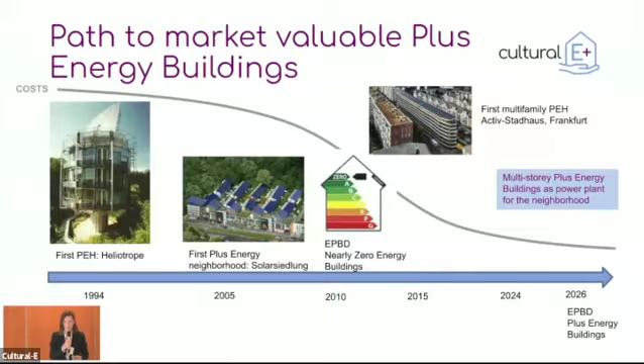What is a plus energy building for us? It is not only a building that produces more energy over a year than it consumes, but it is also able to have a dynamic match between load and generation to increase self-consumption and reduce energy grid congestion whenever needed, and it does that at the lowest greenhouse gas emissions possible.

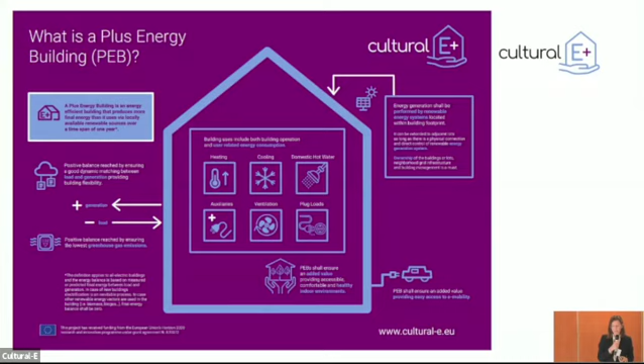It also has an added value for us in terms of health and well-being of occupants, providing a good indoor environment quality and a dynamic indoor environment quality. And it also provides easy access to e-mobility.

How can plus energy buildings become the new building standard? These are the pillars that we bet on at the beginning of the project: to put the user and household at the center, trying to understand their needs and guide them towards better energy practices; to define viable and interoperable technology concepts; to have an integrated climate and cultural approach - that's where the name of the project came from; and also to define business models that are attractive and that consider this added value of plus energy buildings.

Then we have 5 key technologies that we are further developing. The house management system, which is cloud-based, so we are storing and analyzing data on the cloud. It's also taking advantage of other buildings' information and comparing this with them.

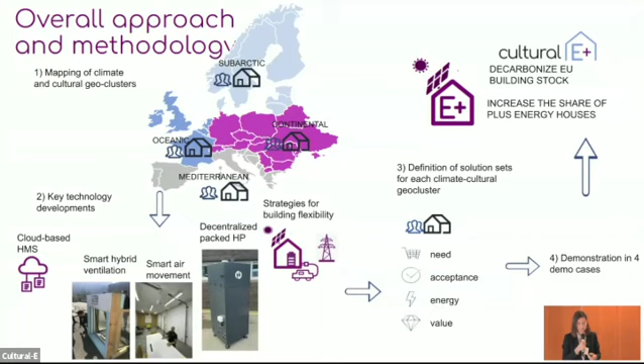All of these technologies are then combined in solution sets that are adapted and tailored to each climate and cultural geocluster. The aim is to demonstrate those in 4 buildings around Europe and to use them to promote and increase the share of plus energy buildings.

Here are the demo cases. We have different demo cases in the 4 geoclusters that we identified in Europe, and each of them has a different business model related to it, since we have a private social housing company, Vilogia. We have a public building for assisted living in Norway. We have a private real estate in Germany and a private cooperative in Italy.

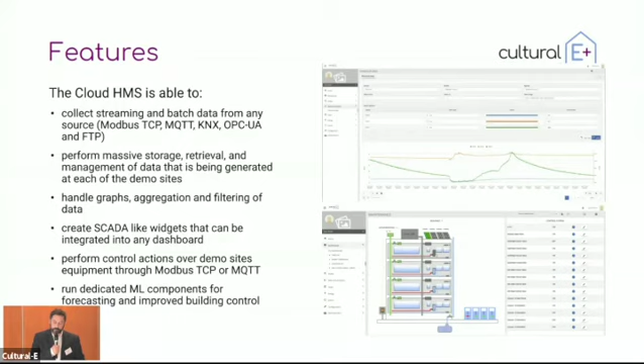So finally, to summarize, we are providing a cloud-based system compatible with all the different field solutions we are finding in the pilots, but also in the real world. We integrate user interfaces for different kinds of users, especially occupants, toward better practices, and also assist in the usage of technologies and control systems. Basically, it will act as a central brain for the control of indoor comfort and other kinds of control strategies.

Okay, it seems we have...

I have a question. Do you think our solution complies with data security and GDPR? As I explained, by design we conceived this HMS to be secure, because we understand that one of the main barriers to reach the residential buildings market with this cloud-based infrastructure are the data concerns, security concerns. And of course, as with any other cloud service, we must comply with GDPR, so it's ensured as well.

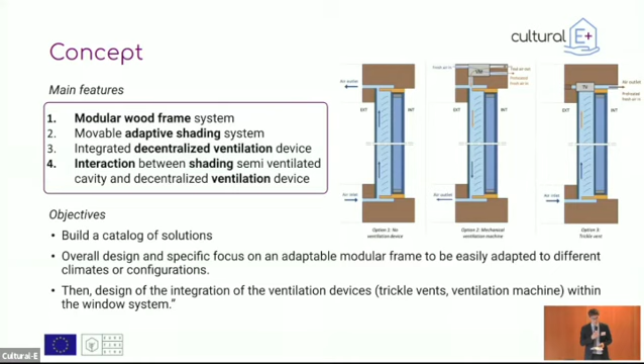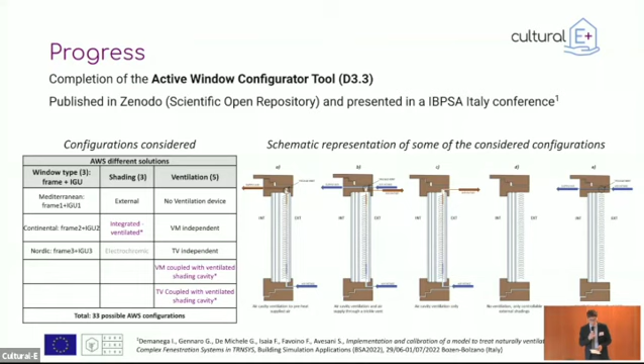Of course, we don't design one specific product, but combining all the possible solutions from different climates and the different possibilities of shading and ventilation, we set up a catalog of 33 different solutions, all based on the same principle and with the same goals. The whole catalog is published and you can take a look at it.

How to manage all this complexity? Because when we put different systems into one, we change what the window usually does—it's a passive element that manages light, thermal factors, sound insulation, air tightness, water tightness—and we add other stuff like shading and ventilation. We have tons of different parameters, and it's easy to get lost.

I think a big step we took in this project is to put together the specific parameters of a window, like U value, G value, and other parameters. There you see only the principal ones, along with parameters specific to the room and the comfort of the internal room.

Then we put together and find a way to combine everything, managing the normal parameters associated to a window, and also the parameters associated to internal comfort like indoor air quality, ventilation, daylighting, and thermal parameters, not just of the window but of the room.

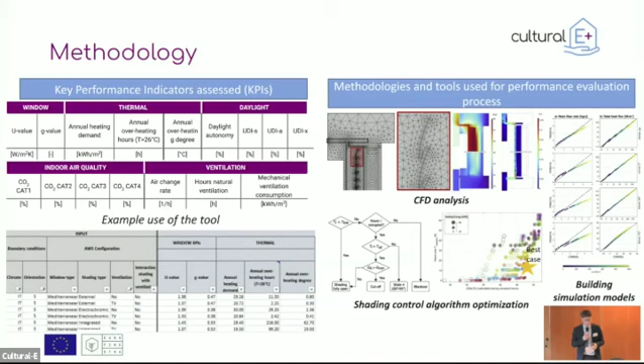We also worked on the shading control, giving an algorithm that can improve all the parameters we want.

At this point, we are basically ready to make the prototype, and we have defined which type of solution we would like to prototype. In the catalog you can find solutions from the easier to the complex. I think this is the main goal of the catalog: to give different solutions for different climates and different requirements. Not everybody needs the full system, but we give a good solution for each request.

About the demo cases, the 3 demo cases, we are finalizing the design and completing a CE marking for the easier version of the product. Basically it's a product made of this frame that is scalable and adaptable to different climates. Not only the frame but also the glass, though the glass is easier to manage.

We're defining the installation method in the demo building, and the system will be connected to the HMS.

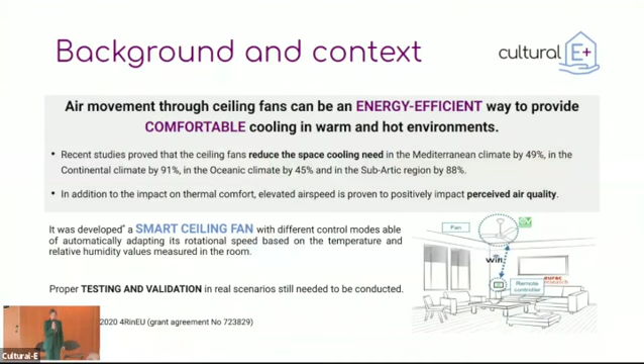In a warming climate, energy demand for cooling will increase a lot in the next years. So it's necessary to find efficient, passive, and low energy solutions. This presentation aims to show that air movement through ceiling fans can be an energy efficient way to provide comfortable cooling in warm and hot environments.

In particular, ceiling fans can also minimize the use of more energy intensive systems such as air conditioning. Recent studies proved that ceiling fans can reduce space cooling need in the Mediterranean climate by 49%, in the continental climate by 91%, in the oceanic climate by 45%, and in the subarctic region by 88%.

But that's not all. In addition, elevated airspeed is proven to also impact perceived air quality, so it can really be a good solution for indoor environmental quality and all its aspects.

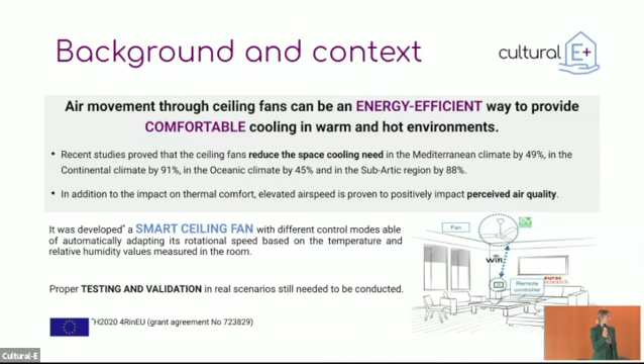As part of the Cultural-E project, EURAC Research with the University of Venice and Vortice performed an experimental campaign this summer. What did we ask ourselves?

First, does air movement improve thermal environment and indoor air quality acceptability in residential buildings? Then, does the automatic algorithm work in terms of resulting comfort? And is there any significant difference in people's answers between manual and automatic control?

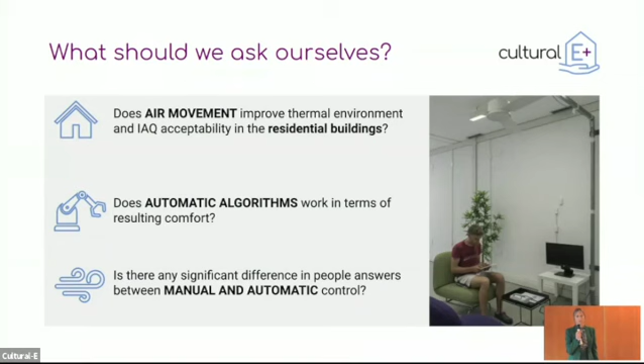In order to answer those questions, we performed a climatic chamber experimental study in our lab in Bolzano. We used two climatic chambers set up as residential environments, like living rooms.

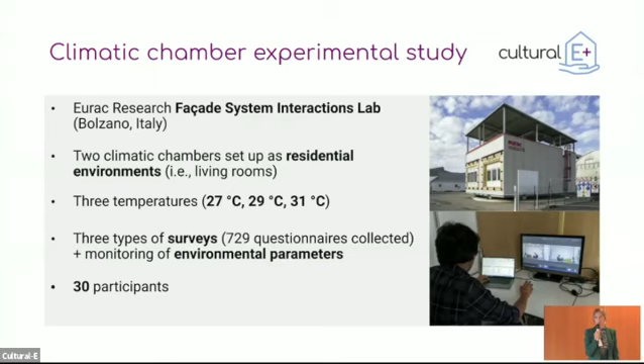Participants experienced 3 different temperatures: 27, 29, and 31 degrees. We asked them to fill out questionnaires while we monitored the environmental parameters. The sample was composed of 30 adult participants.

So we could answer that question, yes. Air movement really can improve the thermal environment in residential buildings. In particular, we could see real benefits until 31.5 degrees. After that, the air movement provided by a ceiling fan does not seem to be enough to guarantee thermal satisfaction. We could also calculate the temperature at which it's necessary to switch on a ceiling fan, and this temperature is 27.6 degrees.

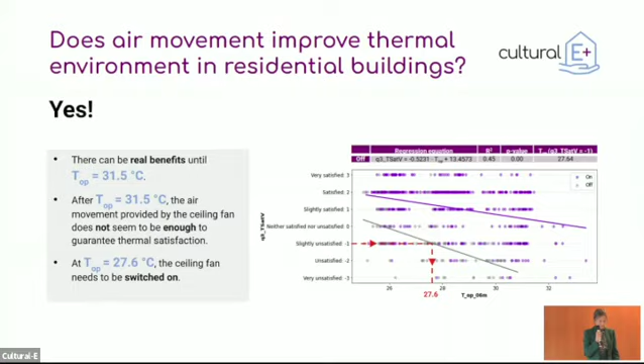The automatic algorithm seems to work really well in terms of resulting comfort. On a thermal comfort point of view, the percentage of satisfaction is higher than 85%. On perceived indoor air quality, higher than 82%. On perceived air movement, higher than 58%, and on perceived soundscape, higher than 77%.

Then we asked ourselves, is there any difference according to the ceiling fan mode? What are the different modes? Speaking about control, the modes are the automatic mode, so the algorithm mode, and the manual mode. Then there are two flow direction modes: direct mode and reverse mode. Direct mode means the air movement comes from the ceiling and goes to the floor, while reverse mode means the air movement goes from the floor to the ceiling.

We could see that the automatic mode differs very little from the manual mode in terms of resulting comfort. This means the automatic algorithm can predict really well what people want. We could also see that the direct flow mode works better than the reverse flow mode, and that the automatic algorithm is able to increase the neutral temperature in summer by 2.3 degrees.

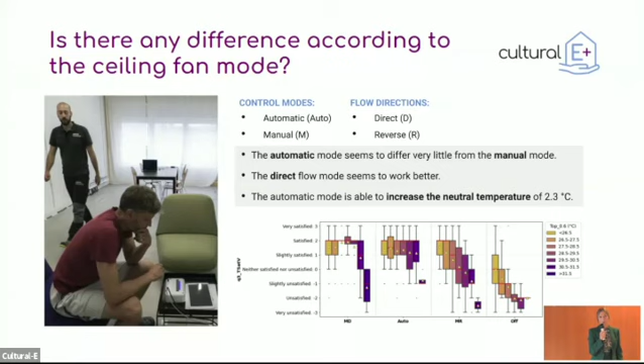And this is really important from an energy point of view. To conclude, we could see that ceiling fans are an effective way to provide both comfort and energy saving in warm and hot indoor environments, and that they can complement or replace the use of more energy intensive cooling systems such as air conditioning. We developed a comfort algorithm to automatically control the fan speed. The important part is that the comfort level achieved with automatic control is the same as what people experienced with manual control, but without requiring them to do any actions. So, thank you.

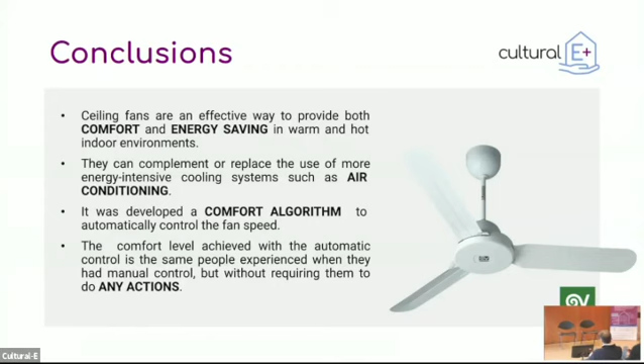So how will climate change affect the energy demand of households, in your opinion?

Or energy requirements for cooling systems, that's correct. That's what we aim for with smart air movement.

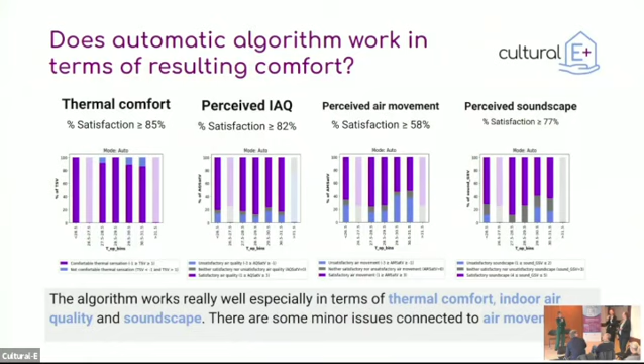Thank you. My question, I put it also in Slido. What was the height of the rooms where you were testing? Because here, if I imagine a fan, it will not be good for some person. It was 3 meters high. Yes, because in Italy, regulation for indoor rooms where you can live requires ceiling higher than 2.7 meters, so 3 meters.

Yeah, actually, to comment on that - yes, it depends on the area. To further comment on that, it is a limitation of the technology that we acknowledged since the beginning of the project, because it can be, and it proved to be, an alternative to cooling systems, and the highest potential is actually in the northern and continental climate, because it really can be an alternative to AC systems. But the issue is about the ceiling height, so energy efficiency regulation requires lower floor-to-ceiling height, and this is something we have to work on to re-engineer the product in order to fit into those heights.

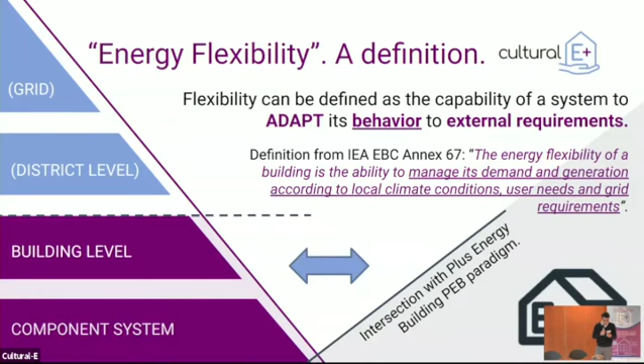On the left, you can see grid, district level, building level, and component system level. In the presentation I'm introducing now, we are seeing energy flexibility decline only to the building level and component system level. At this level, we are going to see if it's possible to change the consumption behavior and aim at reducing some kind of objective, always in the framework of PlusEnergyBuilding.

Therefore, we are driven by the same final objective: environmental and cost reduction. In this sense, it's possible to find a theoretical definition of the possible actions that may be put in place to practically actuate energy flexibility. On the bottom left, you can see consume less, therefore energy efficiency, and on-site renewable generation—the two components embedded in the building that enable local production and reduction of consumption during its operation.

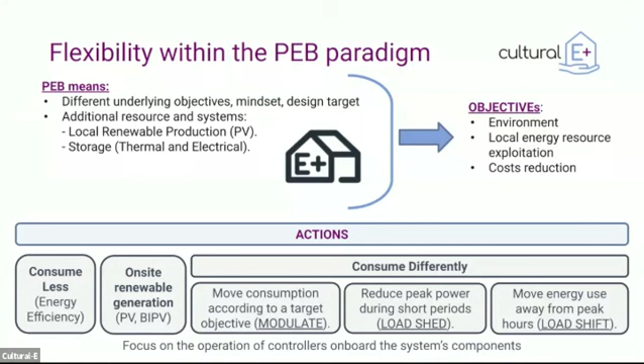Whereas on the right, we see consume differently. By consume differently, I mean the change in the way the user interacts with the building, or the building itself, therefore the devices present in the building may change their operation. Here the keywords are modulate, load shedding, load shifting. These are keywords very related to the electrical point of view, therefore to the load profile connected to the load consumption of the whole building, the devices, the appliances, and so on inside the building.

Here we can see two different contributions, which I already introduced. On the left, a positive contribution, therefore production from photovoltaics or building integrated photovoltaics. There is also production introduced by the energy storage system, which will shift the actual PV production in case the renewable energy does not match the actual consumption the building is experiencing in that moment.

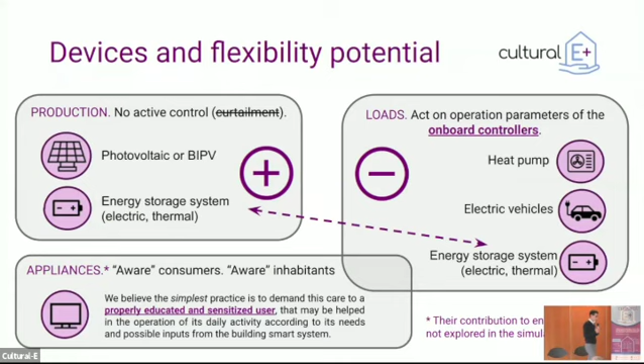On the right, we can see the loads. Here I present a reduced subset of loads: heat pump, electric vehicle, and again energy storage system, therefore static batteries. These are the most energy intensive loads. On the other side, they have on board a controller on which we can operate, on which we can act to induce the change in energy consumption that we saw in the previous slide.

As you can imagine, Annamaria already introduced that we are exploring the potential in different geoclusters. All the subset of devices you see in the previous slide have different potential within the four identified geoclusters. These potentials are identified both from state-of-the-art literature and from load profiles acquired from other simulations performed in other tasks of the project. The final key point is that we bring all the components present in the house, and so all the consumption patterns that compose the overall load profile of a house, to an electrical domain, therefore an electrical load profile.

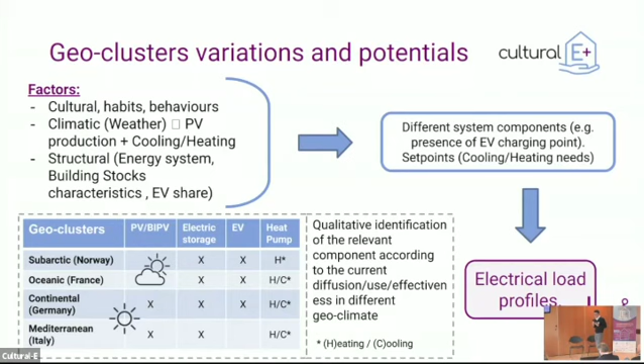This key point is very important. On the other side, we may imagine defining different objectives, for example cost reduction, and therefore we require a more sophisticated environment to produce predictions related to energy production, renewable energy production, energy consumption, and other factors that may impact the actual energy profile of the building. Here we call this advanced control logic, or model predictive control—you have to run the simulation, the virtual model of the building, and check if it's possible to maximize a given objective, for example cost reduction.

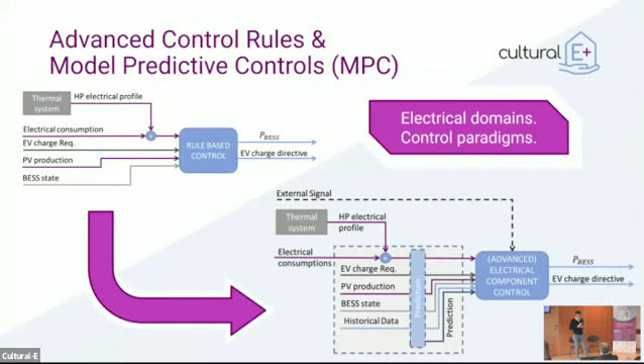Now our work is to perform simulation on that kind of scenario. Therefore, we set up a simplified model of the building and run a long-term simulation on the length of one year, and we check if it's possible to minimize some kind of objective.

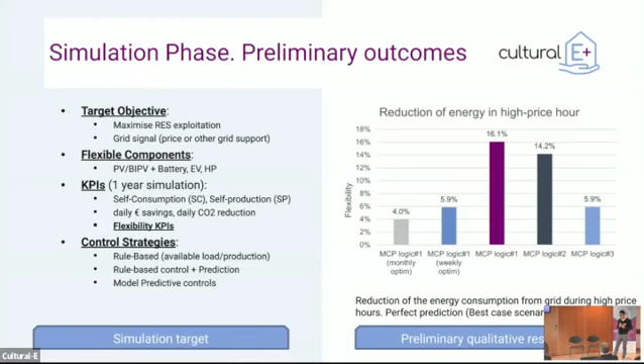For example, we can see some preliminary outcomes that show that with different kinds of model predictive control, we can achieve a reduction in the energy consumption from the grid during the so-called high price hours, which we define according to an external signal. The key point is that we have an external signal on which the objective function is based, and we try to minimize this cost function.

Finally, I spoke of simulation, but our final target is to bring some of the devices and technology that we see in the previous slide into our experimental facility at EURAC Research in Bolzano, Italy, and to try to match the following point, that is, somehow model validation, and check if it's possible also to port to existing devices some of the logic that we develop only in simulation. This is my last slide, so thank you for your attention.

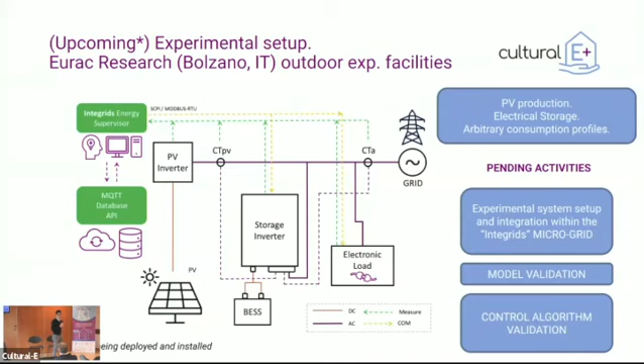I don't know if you have questions, because I have no slides after. So yeah, I see.

Thank you so much. I wondered, this is, my question is a little bit based on the experiences from practice in Denmark. So we're subarctic, little sun, very cold, and so on.

We find it really, really hard to do. I mean, it's okay to design energy neutral buildings in operation, but the problem is that when you factor in the embodied carbon in solar cells, in the building fabric, it doesn't look so good. Particularly for PVs, that if you look at market shares, are usually based on production by coal in China. And in our environment, these are never paid back environmentally. I think that they may be paid back, but it takes many, many more years than, for example, the service life.

Exactly, and this is the reason also why we are exploring all the devices and technologies in different geoclusters. Because, for example, in subarctic regions, the CO2 equivalent emission connected to production of energy is very, very low. So if you set up an objective function to minimize the CO2 emission, it's very, very difficult to do something with the devices, because it's already very low.

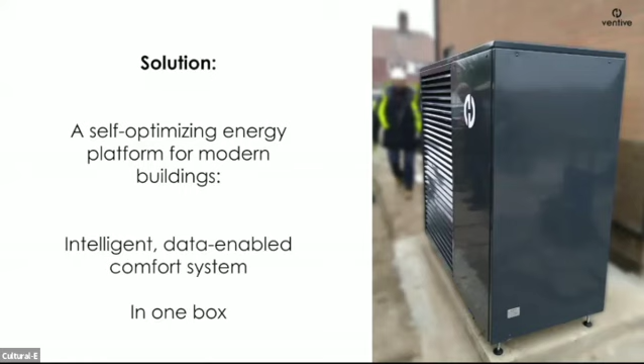So it has a full mechanical ventilation with heat recovery system in the B model. I can take you through the product. So we have three models. The exhaust air heat pump is built for certain markets that are looking to place heat pump technology into a new build,

and some retrofits that haven't quite managed to achieve a decent level of air tightness within the retrofit itself. It provides renewable heating. It uses a centralized exhaust ventilation system to extract air from the building to create a healthy environment indoors. Natural makeup air will replace the exhausting air and allow the building to stay healthy.

But obviously, normally with a centralized mechanical exhaust system, you would have a huge energy loss through convective heat loss. Now, we will pass the airflow through a heat pump and extract a large proportion of that heat that would normally be lost to outside. We will then put that heat into a phase change material block at the base of the unit, which will give us a significant amount of energy storage. And that will then be directed back into the property for space heating and hot water as well.

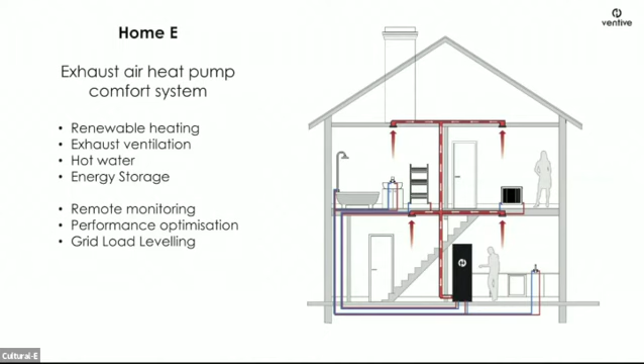The reason we've shown it to a communal area is because, again, it's subject to air tightness of the building. If you have not achieved significant air tightness, you would struggle to balance the airflow well through the building by supplying and extracting from each individual room. You're better off supplying to a centralized area and exhausting from each room. You would get some makeup air coming through from infiltration, but the risk to supplying to each room means you can end up pushing warm air out of the building through the cracks, etc.

So there's the initial difference. Now what the introduction of a supply air through the system and a balanced air handling system allows us to do is to give an element of cooling to the supply air based on creating hot water during the summer.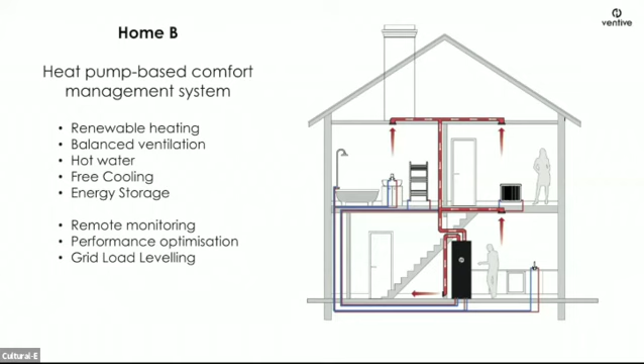Next step is to develop this into a full hybrid system, incorporating the ability to switch between an exhaust air handling system and an air sourced heat pump. This allows us to deal with larger loads, and again will increase efficiencies.

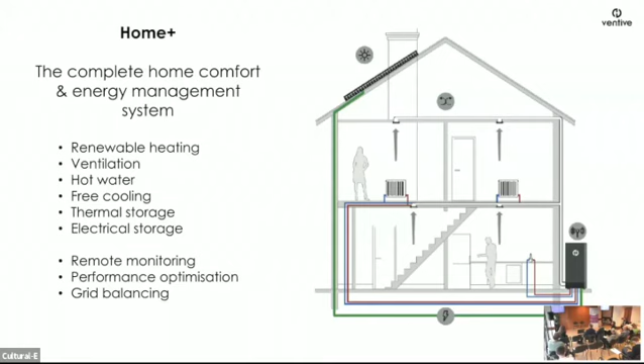You can see here that the PV has been linked up to the box on the system. This is one of the benefits of having all of the utilities effectively in one place in terms of hot water provision and heating, because we can manage the flow from PV. If it's not being used by the building, we can help direct that into the heat store. Next slide, please.

Performance monitoring is critical. We have a lot of sensor points—over 40 data points within the unit itself, not including the environmental monitoring within the buildings. Things like CO2, relative humidity, and temperature can map performance to the design intent. Then we have things like compressor temperature and speed of fans, and pressure within the airflow to see if we've got an issue with the filters, for example. So a number of red flags can be provided through the system over time to allow us to monitor that performance. Next slide, please.

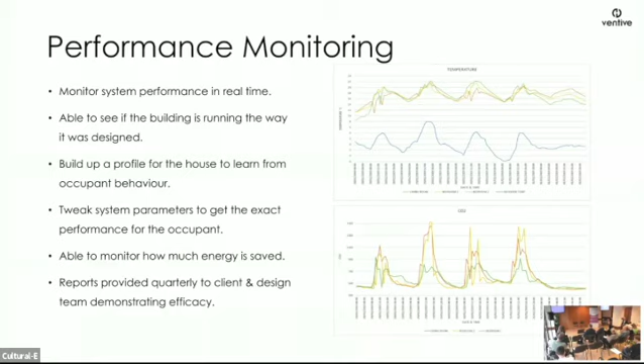There are a couple of interfaces we've started to develop which will allow real-time monitoring. Critically, a client looking after multiple buildings, or a landlord who owns multiple flats or buildings, will be able to dial in and see performance data, look at historical reporting, and optimize the system to their own preferences and that of their tenants or occupants. It also allows them to start forecasting maintenance programs, which is a very high cost issue for landlords and facilities management companies. So the easier we can make their lives, the more likely this technology is to commercialize and scale as quickly as we intend. Next slide, please.

There is, as you'd expect, also a resident interface we've been developing. This is purely to allow set point control for temperature, the single most important factor for our clients. Let's be honest, it's all about comfort and cost. So we allow them to manage their own comfort, while the system takes care of optimizing that comfort provision, whether it's drawing energy from the grid at peak times or off-peak times. Next slide.

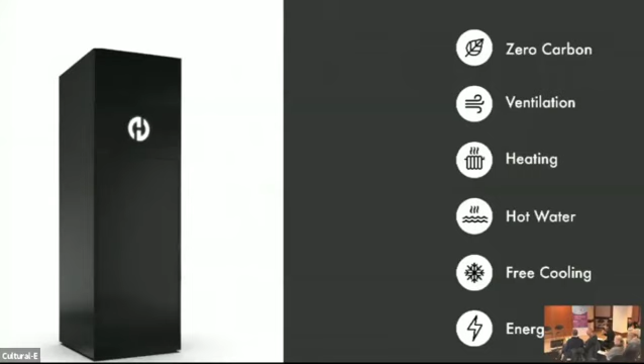Thank you. Okay, then that's all I need to say on the matter. You can see the bullet points on the right-hand side—that's what we're addressing. It's an all-in-one system designed for the European market and built here in Europe.

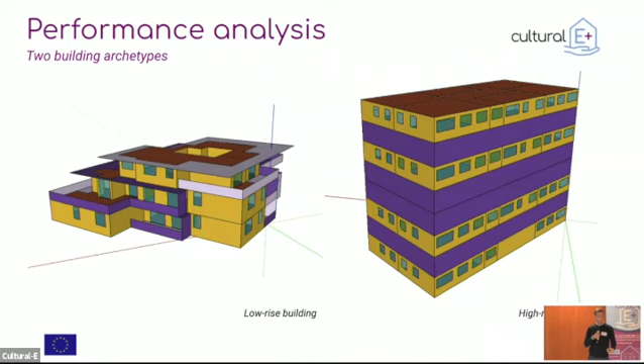The inputs taken into account in each building archetype were very related to the Cultural-E project, considering the different geoclusters. For example, U values of the windows and envelope, G value and U value of the windows were different across the geoclusters, as well as the temperature set points. Regarding internal gains, they were statistically defined, also based on different geoclusters. All these inputs were taken into account in the two building archetypes, considering the four geoclusters you also saw in previous presentations.

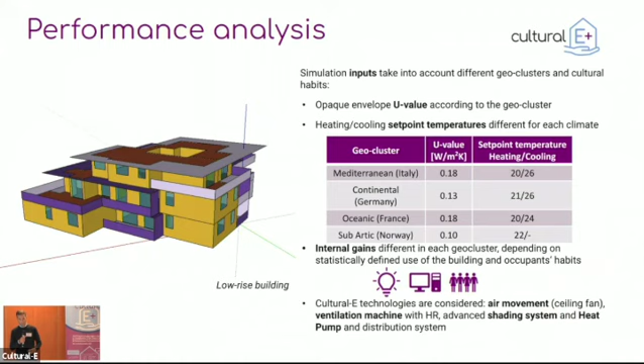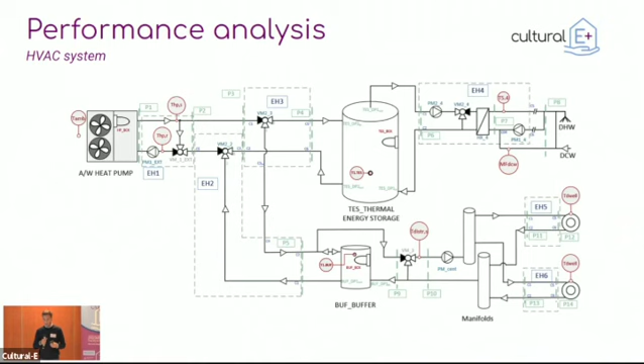I'm not going to go into details about the HVAC system, but regarding the mechanical system serving the building, we took into account all the blocks in the system, from storage to production with the heat pump, and everything was taken into account modularly.

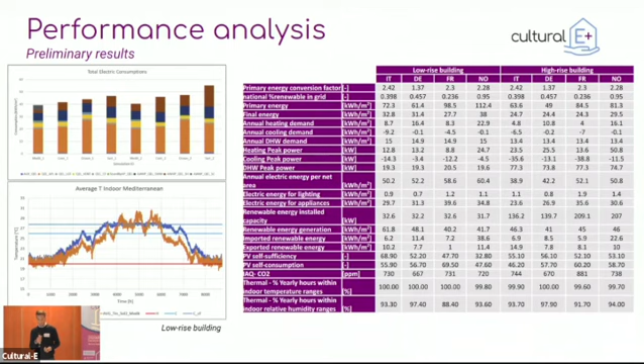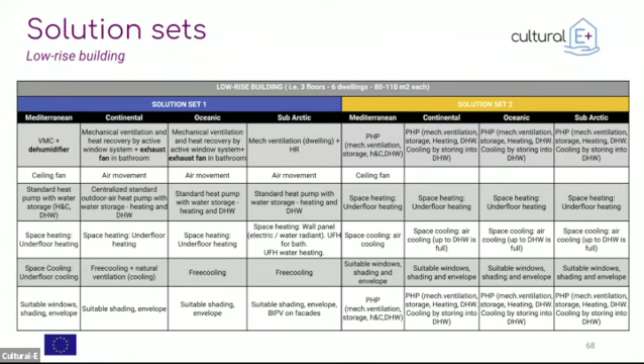Something also needed was considering different solution sets: how do we combine these different technologies in different ways in order to reach the positive energy building target. We hypothesized two solution sets, one more centralized and one more decentralized. For each geocluster, in both the low-rise and high-rise building, we tried to understand the best performing solution in each aspect - air movement, production of hot or cold water for cooling and heating, or domestic hot water production - comparing centralized and decentralized options. The results shown before were related to these two solution sets.

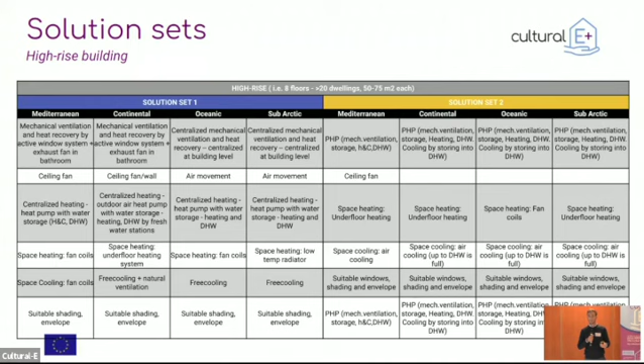As a next step, we are releasing these two building archetypes - the actual files - that will enable users to run simulations, changing solutions and inputs to see how the positive energy building target can be achieved, and what impact this has on energy consumption, environmental quality, and so on. That's what we're working on next.

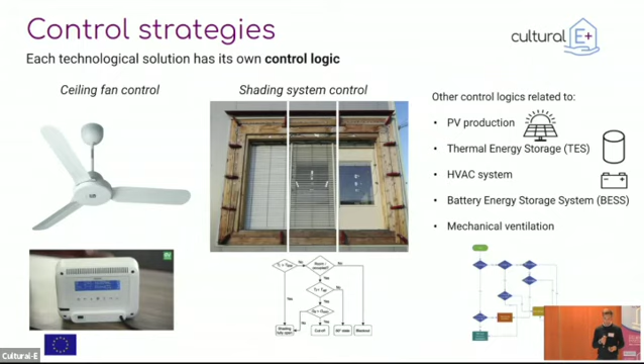Regarding control strategies, which is in the same sphere of interest but a different aspect, you saw that each technological solution has its own logic - for example, the ceiling fan control shown before by Giulia, or the shading system control Giovanni talked about regarding the active window system. Every system has its own control strategy because it needs to work a certain way. So the question was: since we have all these technological solutions and many sensors in the building, how do we gather this information, combine it, and make sure everything works in harmony?

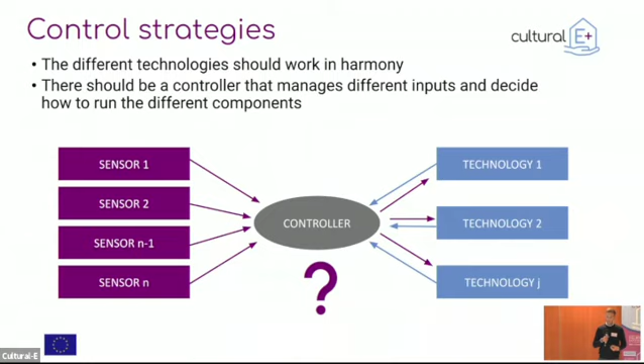So of course it's not an easy task to tackle. But our approach is, with the objective of maximizing thermal comfort and indoor air quality while trying to minimize energy consumption, to consider some hysteresis at the beginning. So hysteresis in the sense that we have to make sure that we don't send control signals every second, so we have to consider some dead bands, let's say.

Then we consider some schematics that tell us different ways in which our overall technological solution set can work together. So these schemes go from one mode to another, which are separate blocks, let's say, and then internal modulations which do some fine tuning. Together, putting all these elements together, we directly send a control signal to the system.

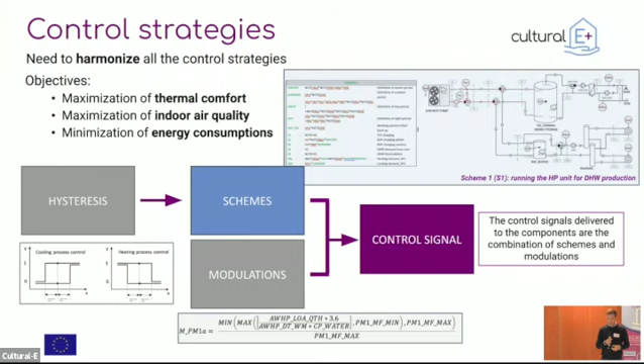Yes, but when we try to harmonize all these and imagine control strategies, we think that we know what the answer is and we want to implement that answer. But the reality is that maybe users are not that happy letting the system do what it wants, and sometimes they want to take control. So I think...

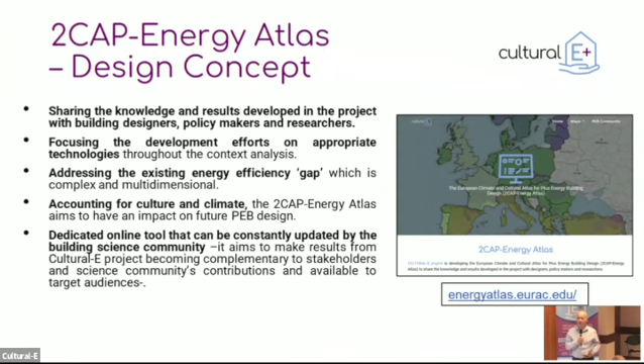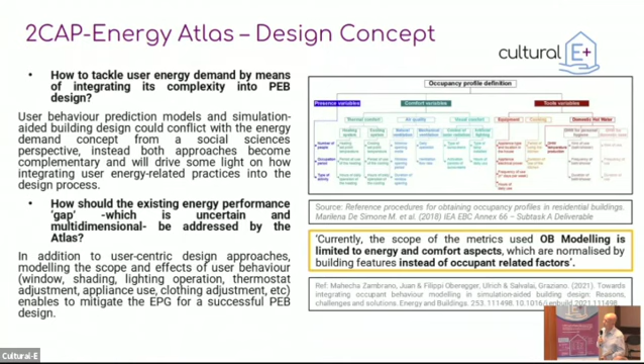I'm not going to speak to these slides because I know time is against us, but I'm assuming that everybody can see these slides and can direct questions if they wish to. I'll skip this one. So two real aspects here.

One is a set of information designed to specifically provide design advice for designers of all sorts, architects, but many others as well involved in building design processes. And then a set of, as I mentioned, this cultural data.

The idea is that we will draw on data from across different work packages, and that process is already underway. We will have these different layers of information which we have been compiling to date. I do want to get to the slide on interviews.

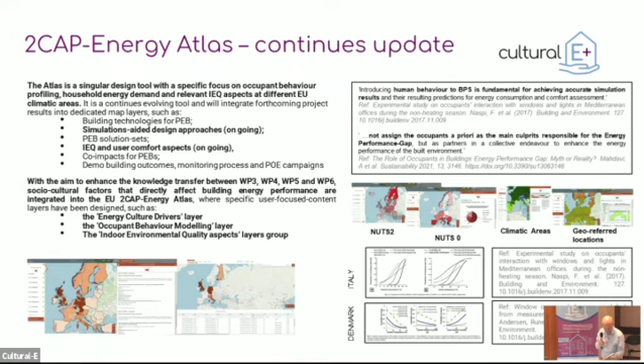Here we go. So just briefly, my understanding is that over 20 interviews now have been completed across 3 of the study sites, not obviously in the buildings themselves, but in similar sorts of energy efficient buildings, to provide us with an initial set of qualitative accounts.

From building occupants about what kinds of things might be going through their mind when prompted about how they use or adapt to these kinds of highly energy efficient building technologies and situations. And we literally have transcripts now. We're just at the process of starting to analyze those transcripts, which will give us a first set of insights.

So to come back to my initial point about this sort of 50-year problem: we know we don't want a building that is entirely controlled by users, and we know we don't want a building that is entirely controlled by automation. We know it's somewhere in the middle, but the reality is there are so many different aspects of control that need to be mediated, and that's why I made that joke at the beginning.

It depends on the day of the week. It depends on whether I have visitors. It depends on whether I have a cold or whether I have just been to the gym. It depends on so many different factors as to what I might want from a building at any one moment. So how do we provide design up front that will deliver flexibility, but not at the expense of energy efficiency?

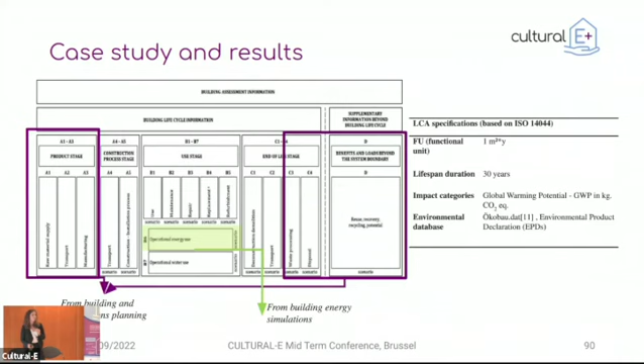Specifying the LCA analysis, we consider the impact over the whole building, using as functional unit the square meter of net floor area per year, analyzing the environmental assessment over a 30-year lifespan, meaning we are not considering any replacement of components. We consider environmental databases which are generic but also specific to the construction sector, like the German Ökobau.dat, as well as specific data sets coming from, for instance, environmental product declarations.

These are the results of the LCA looking only at the embodied impact. The results are pretty surprising—not really surprising, but anyway surprising—because it leads us to a dilemma. Almost 90% of the whole embodied impact belongs to the photovoltaics, which is both a question for us and an answer. It's like a chicken-and-egg situation: we are adding embodied impact, but thanks to photovoltaics, we are also able to decrease over time the total environmental impact of the building.

Looking at the total embodied impact, the low-rise building has a higher potential in comparison with the high-rise building, but this is mostly due to the surface, which in the low-rise building is of course less than in a high-rise building.

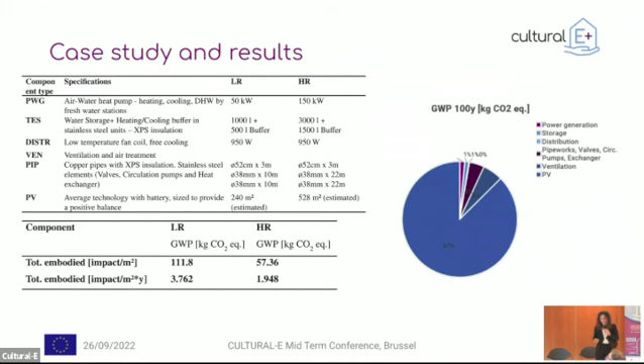Looking at the operational impact, we consider 4 different profiles, the 4 different national energy mixes, and the results coming from the energy simulation and energy balances. As a result of the energy balances, assuming a predefined pre-sizing of the photovoltaics, we notice it's not always easy to ensure a positive balance—it's easier to reach a positive energy balance in a low-rise building, where we have fewer users and less energy demand.

And in this sense, we can also reach, considering only the operational phase, a positive environmental profile, while this is not possible in a high-rise building.

I would like to focus now on a low-rise building, considering the overall life cycle and how we started emitting CO2 in the atmosphere. This starts today, in 2022.

This is the first initial environmental investment, and then over time we can decrease the total global warming potential of the building by avoiding CO2 emissions from the national electricity mix, and by using instead the electricity coming from the photovoltaic system.

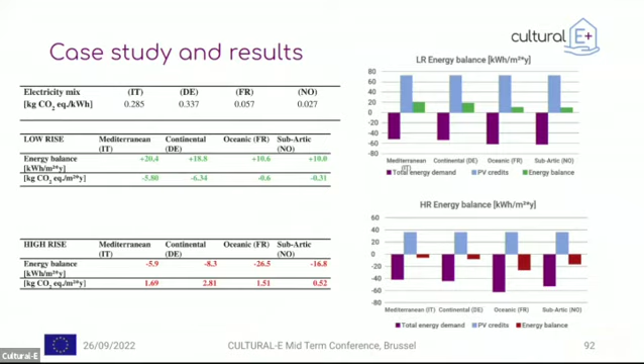The reason comes from the environmental profile of the national electricity mix. France, as we are aware, has a nuclear baseline, Norway hydroelectric. In this sense, we can say that the payback periods are really affected by the carbon intensity of the current national electricity generation.

Concluding the presentation, wrapping up what we learned today, there is a possibility to find really strong differences between the performance level of solution sets for PlusEnergy houses, and the effects can be related to 3 main factors: the design choices, the cultural and climate context, as well as the national energy generation. Regarding design choices, again, the photovoltaics are the main responsible for the total embodied impact.

But also the building type can dictate the operational energy, and within a high-rise building, a positive energy balance is not ensured, and therefore other surfaces should be spotted around the building envelope.

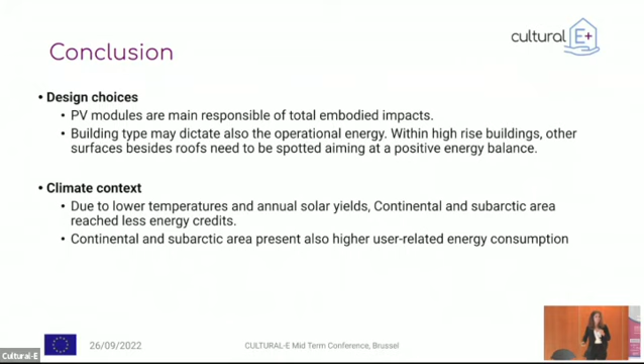Looking at the climate and cultural context as well, due to lower temperatures and annual solar yields in continental and subarctic areas, there are fewer energy credits, and we notice that continental subarctic areas also present higher user-related energy consumption, but this comes from currently collected statistical records.

Finally, last but really not least, this is the biggest problem: the national energy generation. Overall, we can claim that where the national electricity mix is still carbon intensive, the PlusEnergy houses can be an opportunity for improving the environmental profile of the building in a first instance.

But also, on a higher level, improving the overall environmental profile of the national energy mix. All analysis should, however, be conducted on higher levels, on the building level, because we are now showing that we can pay back the CO2 by 2050, which is good news.

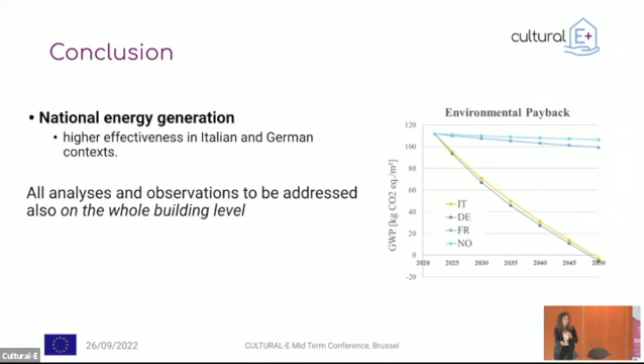But unfortunately, when we look at the building level, this is not always completely good news. I consider here 3 typical scenarios according to the DGNB system, which is the German environmental certification system for sustainable constructions. Within this system, there are 3 reference buildings provided.

One is the reference building based on current practice, then there is the target building, which can eventually achieve environmental certification, and then there is the DGNB Target Plus, which can reach the highest certification of environmental sustainability in buildings.

If we recalculate here the payback period, the year of payback is really far away, and this is not reasonable, not possible. But if we look at the Target Plus building, it's still reasonable—2070 is not that bad in comparison with the reference building.

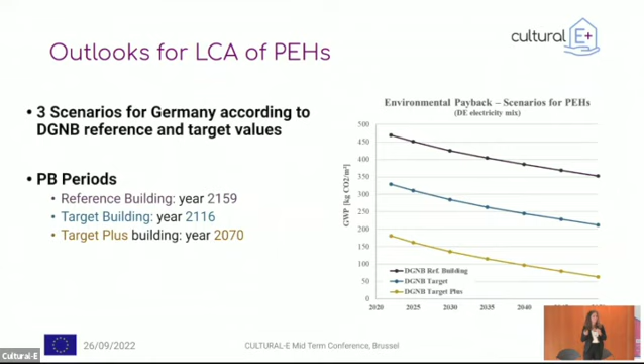So I would like to raise some questions, some doubts, on the design choices, which can really affect our main goal: climate neutrality, and reaching that by 2050. In this sense, I would also like to ask you some questions related to the discussion I provided in my presentation.

So as a designer or architect, are you aware of the consequences related to design choices and embodied impact? Because we talked a lot so far, but it's also justifiable—it's clear that we spoke mostly of building operation.

No, there are 2 points. If you consider the path toward decarbonization, all the countries in Europe should sooner or later improve their energy mix. So if you consider a constant energy mix, you can have some results. But if you consider that Germany and Italy have to improve their energy mix towards a more decarbonized energy sector, that payback period could extend, not because they will look more similar to France with nuclear, but because they must give up fossil sources.

Second point: in the analysis, consider that to produce photovoltaic, the energy mix is going to change. So the carbon embodied is higher in photovoltaic, but under the production point of view, there will be an improvement. So you have these 2 effects - are these taken into account, or can we do this?